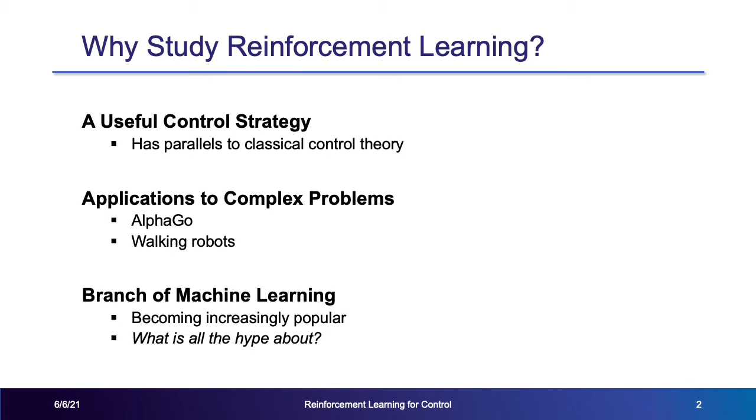Also, reinforcement learning is a branch of machine learning, which is becoming increasingly popular and is used more and more, especially in the engineering industry. As someone that was on the outside looking in, I thought I would benefit by learning what all the hype was about by doing it firsthand.

The most important distinction between classical controls and reinforcement learning is the controller and how it is tuned. Whereas a human manually tunes the control policy in classical controls, in reinforcement learning, the control policy comes from an agent, through which the policy is tuned by an algorithm during a training process. Thus, reinforcement learning replaces manual tuning of the controls with automatic tuning of the controls.

Key features of reinforcement learning include a reward provided by the environment, a specified set of actions, and a limited set of observations. For those interested, I touched on the reinforcement learning process more in the report I wrote, and there's plenty of great documentation on the internet, particularly, in my opinion, on the MathWorks website if you're interested in implementing reinforcement learning yourself.

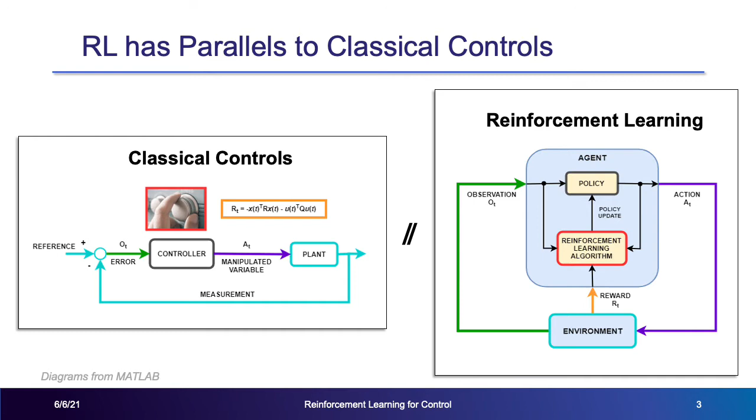After having the behavior reinforced by many trials, the dog eventually understood how to act given different sensory observations in order to receive the reward. In this case, the reward appears to be the ball.

In comparison between the two, the discrepancy in neurons, the things that ultimately determine the control behavior, can be used to explain the discrepancy in complexity. As computing power increases, more and more neurons may be included in the RL agent to achieve more and more complex behaviors in a smaller amount of time.

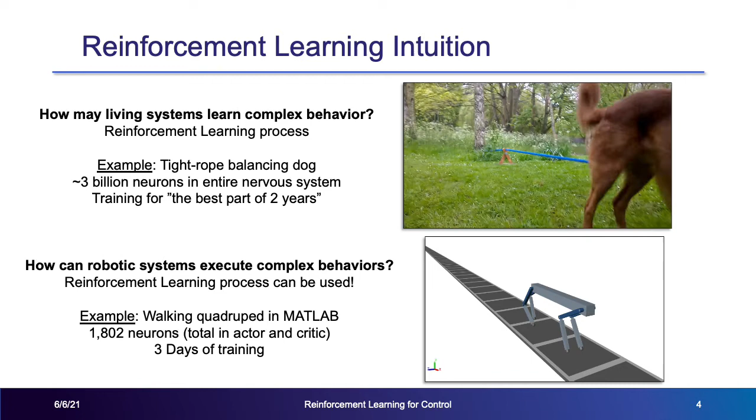So, in this 10-week independent study, I tried to apply reinforcement learning to this ball and beam system that I had on my own. I developed a software model of the real system I possessed first. So my goal was to create a model of the system in Simulink, train an RL agent virtually on this model, and then deploy this trained agent to the actual hardware.

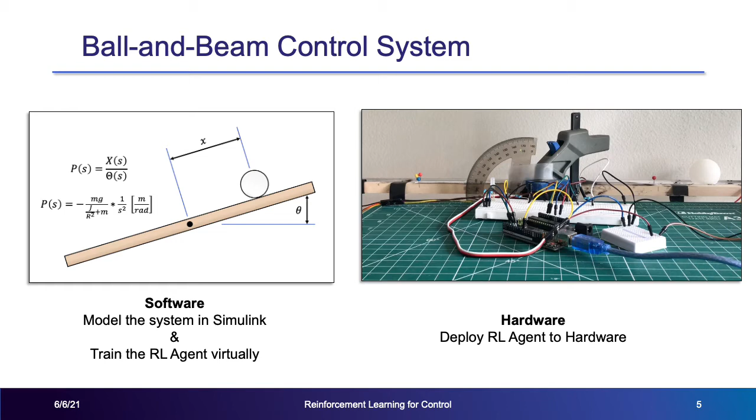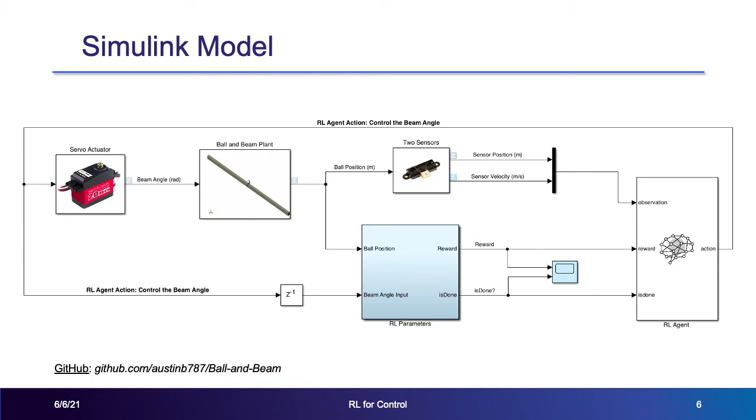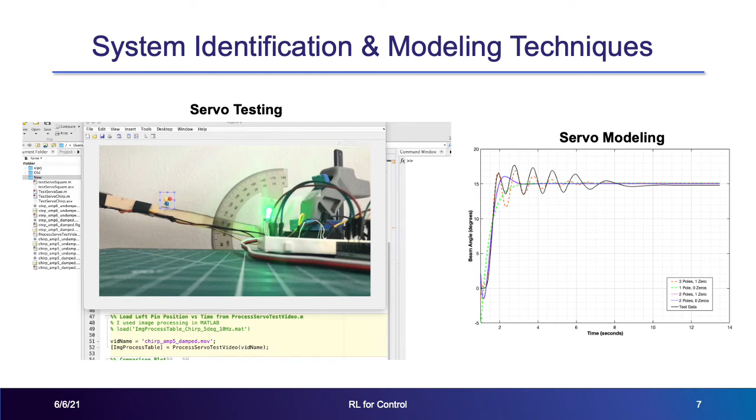First, to model the servo, I used system identification techniques. I subjected the servo to different inputs. For example, the input shown here when I play this video was a chirp signal, and I tracked the beam, as you can see here, using MATLAB's computer vision toolbox. I then used MATLAB's system identification toolbox to create different models and see how they fit the experimental data. The different models are shown at the right.

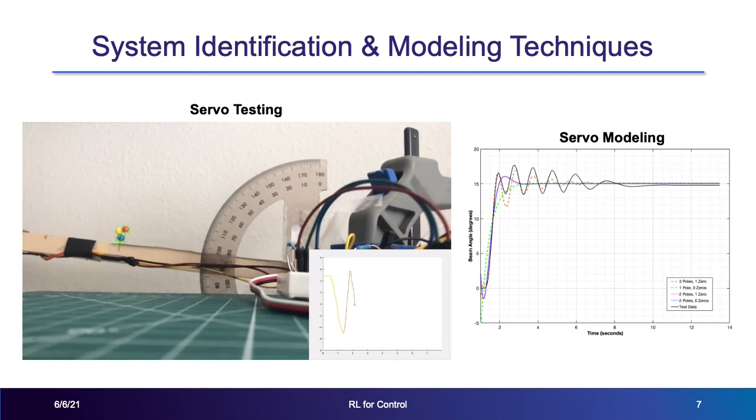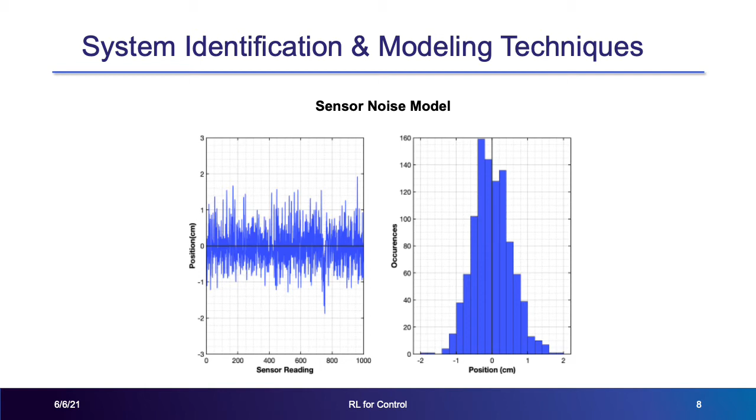In terms of the sensors, I developed a noise model from experimental data. There are many additions to the sensor model I plan in any future work on this project, which I discuss in further detail in the report.

Moving on, a critical element of reinforcement learning is the reward function. A good, correctly tuned reward function plainly delineates good behavior from bad behavior to the agent. A poorly tuned reward function will result in an agent that may be fully trained but not trained to do the desired thing. Perhaps you can think about this better by thinking about how the owner of the tightrope walking dog had to tune the reward function to make sure the dog would actually tightrope.

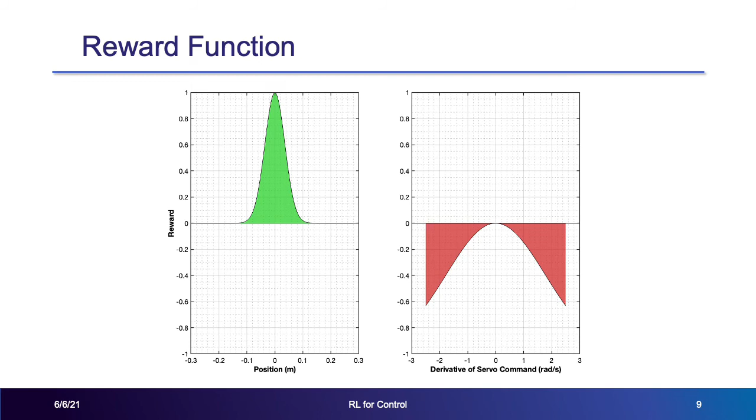Second, the reinforcement learning agent must not command the servo to behave in ways that will hurt the hardware or that are impossible to realize. You can see how I incorporated this performance requirement into my reward function by the plot at the right. Effectively, I penalized large instantaneous changes in servo command, things that the servo cannot actually realize.

For my system, both the actor and the critic consisted of relatively small neural networks. Given the simplicity of my control problem as opposed to the walking quadruped, the total number of nodes in both neural networks came out to be 12 as opposed to 1,802 in the example of the walking quadruped.

Moving on to training, which is the time-intensive process where the agent acts as the controller during many simulations and the actor-critic neural networks are updated. In my case, the simulation started with the ball randomly positioned between 24 and 16 centimeters away from the center of the beam on either end.

The reinforcement learning agent would observe position and velocity from the environment, and then manipulate the beam angle and receive a corresponding reward. So in this plot, the blue dots represent the total reward the agent accumulated for that training episode.

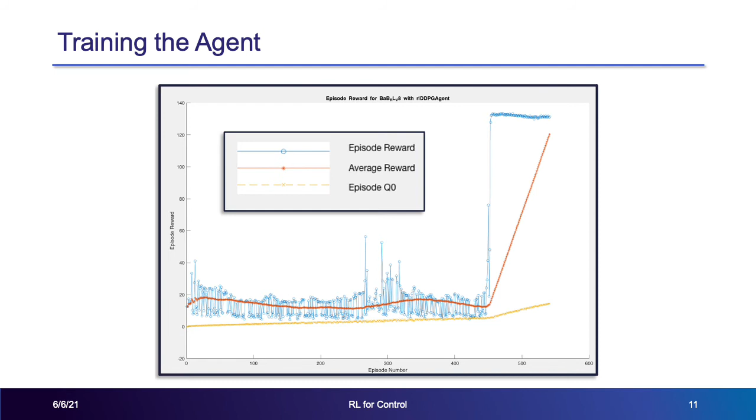So how did this fully trained agent perform in the model? Looking at this Simulink scope, you can tell a couple things. The first plot at the top shows ball position, where the actual ball position is shown in black. The sensed ball position being fed to the agent is shown in green, and then velocity using the same sort of color scheme, and then the beam angle at the bottom, where again, the commanded beam angle is in black and the actual beam angle is shown in red.

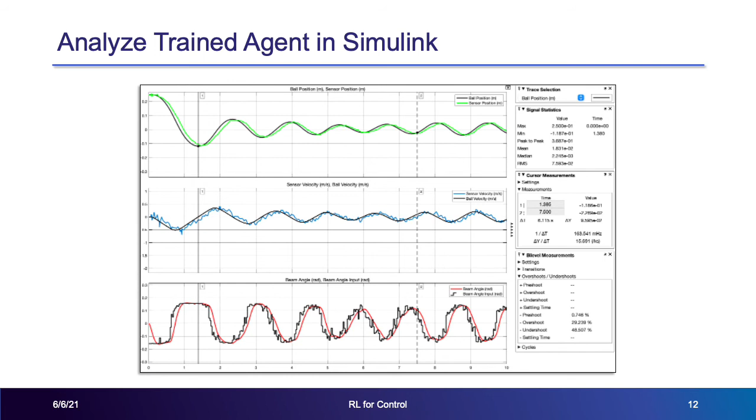As is shown, the ball position is aggressively corrected at the start of the simulation and eventually oscillates near the middle of the beam. The instantaneous change in beam angle input also appears to be acceptable. So you can tell that the reinforcement learning agent was abiding by the rules of the reward function, so to speak. The major problem, however, with these results is that the servo command also appears to oscillate between its command limits, which is not at all desirable. Ideally, the beam angle would come to rest at 0 degrees, where the ball position was at 0. Future mitigation strategies may include revisiting the reward function, among many different things.

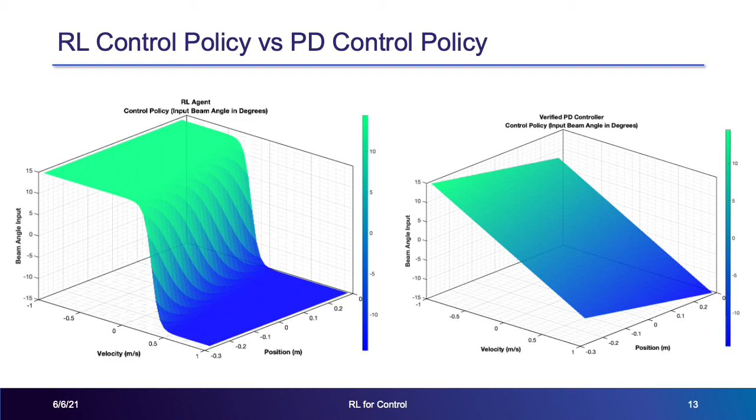Just to give you a better visual on what this fully trained reinforcement learning agent control policy was, I plotted a surface given position and velocity against beam angle input for both the RL agent and a proportional derivative controller, which I verified on the hardware. As you can see, the reinforcement learning control policy has a much more aggressive response to position error and often resorts to commanding this large maxed out beam angle. And this, of course, correlates to the results we saw in the previously shown Simulink scope.

Once the reinforcement learning agent policy has been fully validated, it can then be deployed to the hardware for further testing. In some cases, the reinforcement learning agent may even be trained on the hardware. Unfortunately, I moved away from the hardware during the middle of this project and had no opportunity to deploy a totally satisfactory agent. Nonetheless, I anticipated this might occur and deployed a marginally satisfactory reinforcement learning agent that did converge on a solution during training. I deployed this to hardware and it gave these results, as you can see in the video.

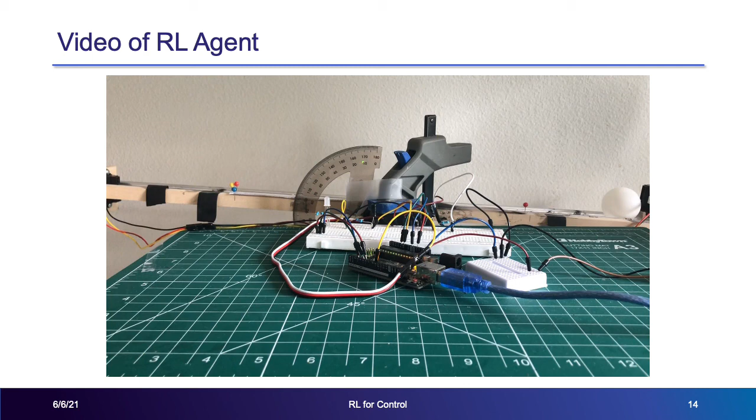You can see that this control policy is a lot like the one I just showed, where the reinforcement learning agent chooses to basically just focus on position and command the maximum or minimum beam angle allowed almost exclusively. Likely, what I think is going on here is several things. There are many things that I talked about in the report, but I think I need better modeling and perhaps a better understanding of reinforcement learning as well.